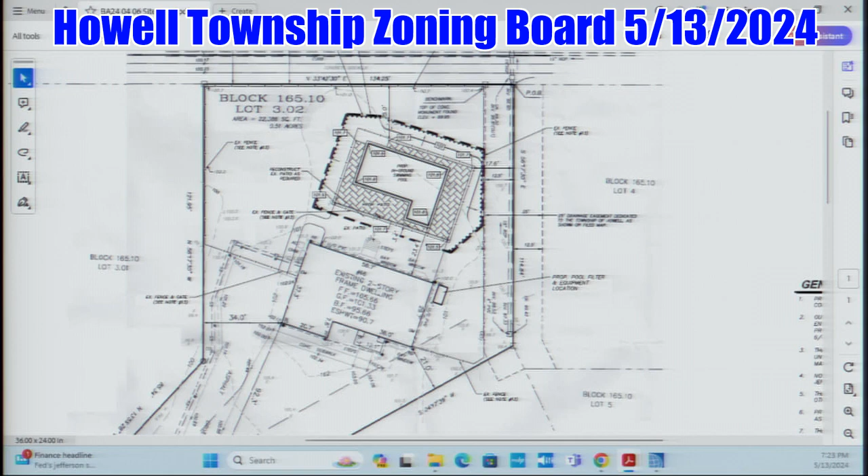Eileen, roll call. Mr. Barillo? Yes. Mr. Cantor? Yes, good luck, it looks beautiful. Thank you. Mr. Hughes? Yes. Mr. Mertens? Yes, and this is probably the quickest application approval since I've been on the zoning board. Appreciate it. Ms. Scottson? Yes.

And Mr. Say, before you put your vote on the record, I just want a couple comments. Just make sure there's part of the approval that they're going to have to get any building permit approvals, as far as like fence around the pool, make sure it's compliant with the swimming pool code. The shade canopy has to be part of it as well, just get any permits as may be required. Any backwash, it be either a cartridge system or directed towards the public right-of-way, not onto neighboring properties. Drainage pattern, same thing, to the right-of-way, not onto neighboring properties.

And then I just had one more. Construction access, I'd recommend that it be from Pemberton Place and not from Howell Road, just because Howell Road's pretty heavily trafficked, and that any curb and sidewalk that may become damaged just be replaced. And then obviously the construction access be revegetated. Those just be conditions of the approval.

Sir, can you comply with that? Yes. Okay, great. So in that case, all of that will be on the record in the resolution, and I vote yes, and have a good time. Thank you, appreciate it. Have a good night. Good luck. All right, thank you, take care.

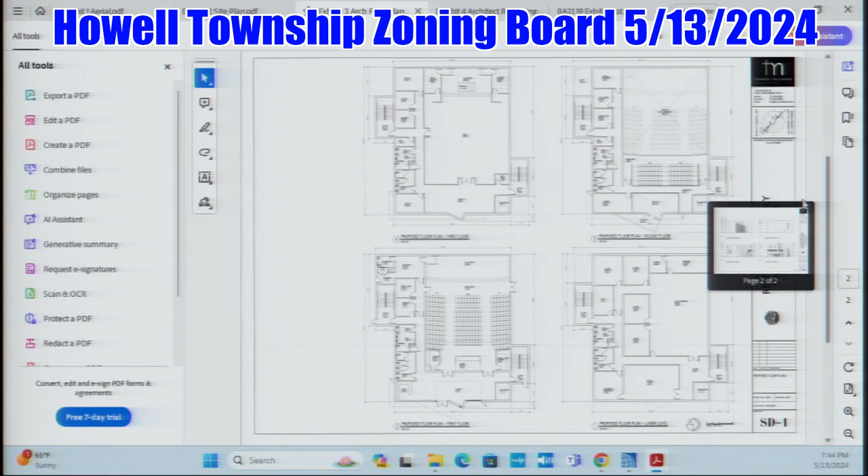There we go. Can we go back to the parking? Did you talk about the parking? The traffic engineer's going to talk about the parking, the number of spaces and how they're designed. I can talk about that, sure. So you want to talk about the 5 tandem spaces? Or 6 tandem spaces? Sure, I'll get to the parking and the access and everything else.

Okay, I just wanted to go through the floor plan on each floor and the hours of operation, exactly what we're doing here.

So the first floor is composed— wait, has that been marked? If not, we need to mark it. Yes, that was A20. Okay, go ahead, I'm sorry. So we're looking at A20, architectural floor plans and elevations. Yeah, that's A20. The architect's going to talk about the architecture of the building, but I just wanted to go over what we're doing on each floor, and then the hours of operation, just so it's on the record and everyone knows exactly what's going to be happening within the building and on the site.

So the first floor is the main sanctuary, that's the lower left, and the pastor's office, then some restrooms as well. The second floor, which is to the right, much of this is open down to the main sanctuary area, and then there's a mezzanine for the choir and additional seating. But there's also the Sunday school office, the youth office, and the sound engineer's office, and the video tech and sound studio as well. The third floor, which is... there we go.

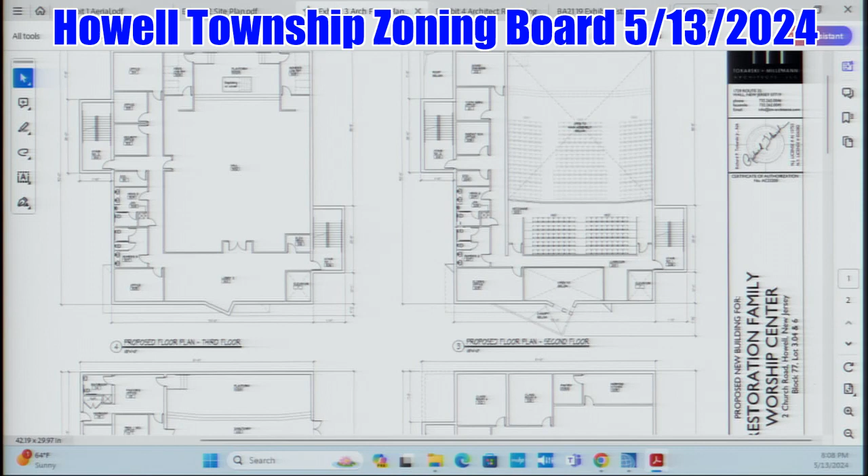The other question we had was the baptistry, how do you say it? Baptistry, which is on the 3rd floor. In my religion, we're used to babies being baptized on a Sunday with a bunch of people coming to church. That's not what you're doing there. No, we don't dunk infants. What we do is we baptize children, mainly when they become teenagers. That's when we baptize them, and our baptisms should be quarterly, but lately we've been having them maybe once a year.

And when is that done as it relates to the other activities? That would usually be done on a Saturday afternoon. So not during the peak Sunday? No, baptism is usually done on Saturday afternoon.

And then Brian described the outdoor activity, that tailgate party. Can you just explain what happens there? So every first Sunday of football, and lately it's been very sad, because all the teams that get together, they're all a bunch of losers. So our church is very heavy on football.

So we use the tailgate party as a means to reach out to our community. We invite our friends, they all come in, and basically each booth prepares a different kind of food, and we go around and share our food one with the other. That's basically what the tailgate party is. And that's one time a year? One time a year. And no other outdoor activity? No, we have no other outdoor activity.

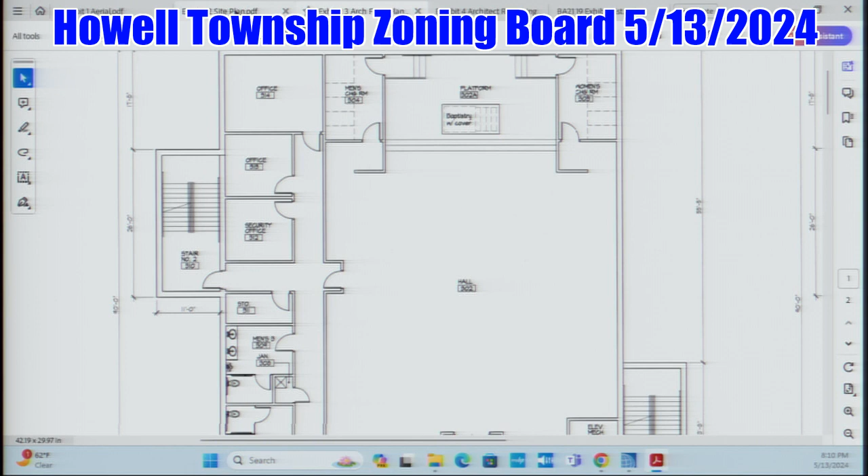And then, did you have any input on how that tandem—and you may not know the answer to this, so don't guess—but the tandem parking that was being discussed, were you familiar with that?

No, I don't have a clue what that is. Okay, yeah. And then the existing church, or the building that's all the way, the older building all the way on Church Road.

We talked about you not making any improvements to that, except that you did have intentions to replace the windows. Yeah, those windows came with the building and they're pretty bad. So we want to improve the aesthetics of the building to somewhat match the new building. So the windows are a must.

Okay, but other than that, you're not making any changes? We want to preserve that building. I have a lot of families from Howell that grew up in that church, and they very often come to me asking if I have a registry for the graves, which I don't. But they walk into the building and they sort of reminisce because they grew up in that particular building. So we want to preserve it for the generations of these families.

Now if this were approved and a new church is built, what would the old church be used for? I'm going to give that to our youth ministry. We have a very vibrant youth ministry, so I'm going to turn that over to them so that they can do what they do.

And what day of the week or frequency of that activity? Currently our youth meets once a month on Fridays. My youth pastors are here, so once I turn over the building to them, they should be able to meet once a week, every Friday.

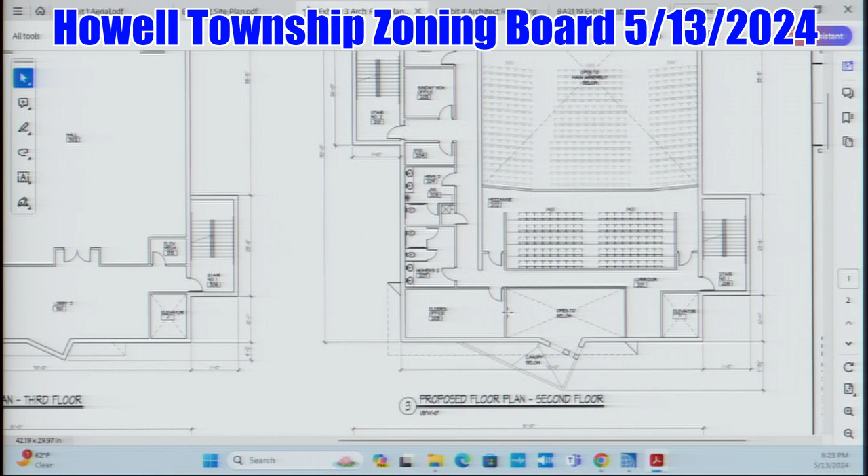A20 is the architectural plans that you prepared and submitted. There's a colored rendering before that, right? Yep. You could describe that generally, but before you do, there are technical comments raised within the planner's report, primarily from Jennifer, who wants some additional revisions. You've reviewed that and you're okay with complying as a condition of approval? Yes, I do. I know she's talking specifically about the rear elevation, which was left rather blank. Yes, we may have misinterpreted the ordinance in terms of visible facades. Because it was facing the cemetery and a tree line, and buried, we figured it wasn't too visible, so we didn't spend too much money back there, but we can definitely address it.

I don't mean to cut you off or hamper your testimony, but thank you for coming, because your plans are far and away a welcome relief from what we had seen with this application prior. We do require treatment around all four facades. I'm not looking to break the bank, I understand this is a church, so if you would just agree to work with my office on those blank sections, we can come up with something that would meet the intent of what we're trying to accomplish, without being crazy in terms of expense. You'd still require the waiver, because technically you'd need bump-outs and fenestrations, which I am not intending to require, but just something along those blank facades that may help break up the massing. Yeah, I'd be happy to work with your office and the town to come up with something acceptable.

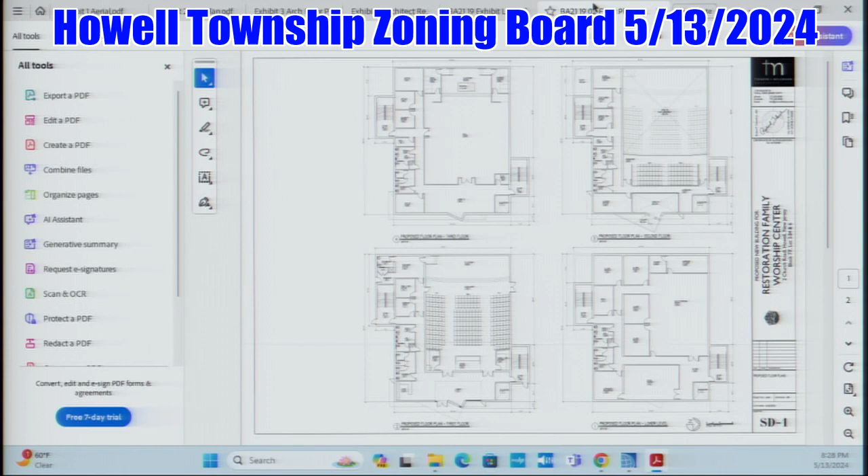The other thing I wanted to address is this piece in the middle, which is more of a modern architecture — a modern interpretation of what a steeple is. This is basically a double height space letting light into the interior. The upper area does not have any working floor space; it's really an architectural element, like a steeple, that draws your focus to the entry and the front of the building. The peak of the steeple is at 50 feet, and we'll defer to the board on whether you want that lower to match.

What's the steeple on the Coptic church? We're trying to figure that out. It's definitely higher than 40 feet, because the parapet's at 40 feet, plus or minus — this isn't engineering documents I'm looking at, it's a Nearmap third-party aerial program that gives oblique views and can approximate. They've got these arched parapet walls and stuff, anywhere from 38 to 40 feet, not including the domed steeple, which is even higher.

Those type of amenities, if you remember even from Christ Church on Oakland Road, are exempt from the height requirement. So I would suggest that, even though the top of the parapet is not the ceiling height, it does count towards the mass height. I know Justin is here and is going to give testimony, because the height is in excess of what's permitted and would require a D variance for the height. He's here to discuss the conditions as well as the conditional use criteria and the height variance.

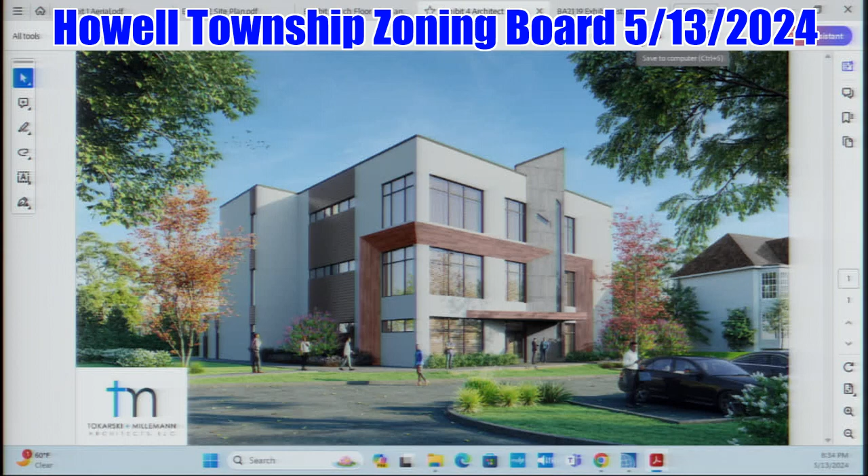We're seeking to have you qualified as a traffic expert. Please briefly place your credentials on the record. I'm a licensed professional engineer, my specialty is traffic engineering. I've been in the traffic engineering field for 50 years - January '74 was when I first started. I have an undergraduate degree in civil engineering from NJIT. We'll accept your credentials, Mr. Rea.

Thank you, John. And I counted cars for a living.

So John, you did a traffic report study some time ago that was submitted in support of the application, and I know you've since updated your counts. Can you describe for the board what you did previously, what you've done since, and give the board your conclusions? We're talking about just traffic and site circulation for now, and then we can talk about parking.

Sure. I have been involved with the project since 2020, and as the board knows, the project has evolved into what's being presented tonight. Originally, I was looking at a plan with a smaller main sanctuary of about 175 seats. I have simply updated my traffic study to include the new sanctuary area of 318 seats, and I updated the traffic counts.

We actually just did updated Sunday morning traffic counts, Sunday May 5th, just last week. I updated the analysis, and basically what I assumed was that the church would grow, as Pastor Glenn has indicated. Right now, they typically get between 100 to 150 people at a typical Sunday service, generating between 40 and 50 cars under the current situation. Of course, the new plan is going to provide for some growth, which hopefully will happen.

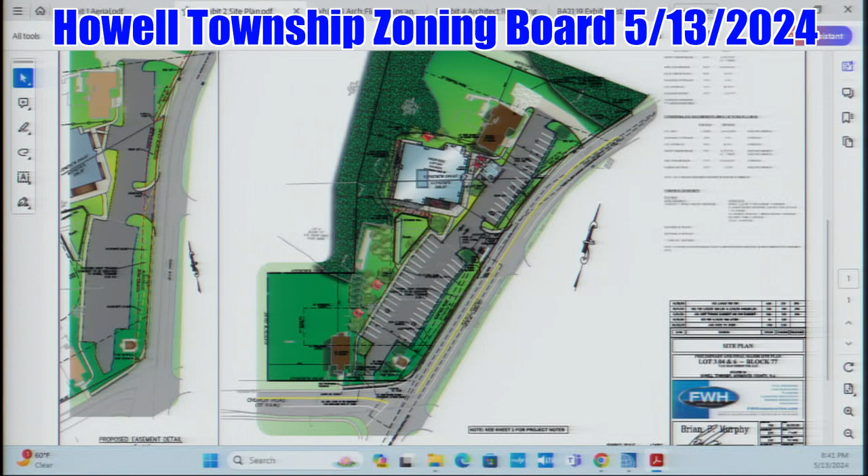That's existing, yeah. So it's like people flying down Kent Road and then making the right turn onto Church. If someone's coming out of the driveway there now, if they're going really fast, they might not see that person. So that access on Church Road is being completely eliminated, it's only for emergency purposes for fire trucks. They're moving the entrance on Kent Road even further away from the intersection, so you've got a little bit more separation, which I think improves it.

My concern is still that residential driveway. I think with signage... what I'm most concerned about, I don't know John if you have the site rendering. Between the residential and the rectory driveway and then the two full-movement driveway, you've got the bay of parking spaces. If there's a backup at the site driveway letting out of services, does someone try to go the opposite way and then come out of the residential driveway?

And so, do not enter signage there? We can post do not enter signs, and one-way arrows on the pavement indicating that it's entrance only, along with the do not enter. Correct. This came up on another house of worship application we had recently, which had pedestrian access from the neighborhood across the street. This one is a little bit different because they're relying on the commercial property across the street to help with their parking deficit.

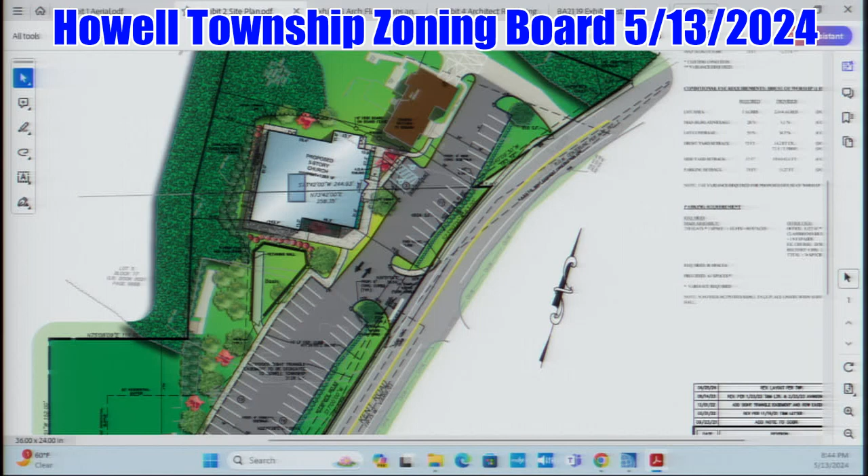They do not allow left turns out of that Church Road exit. But that's going to be closed off. I think the concern is, in the event you have a higher volume day at your service than your parking lot can accommodate, and individuals have to park across Kent Road in the daycare parking lot - which I agree, in the evenings and on Sunday the daycare center is not operating - but I will say I have witnessed from my car people flying down Kent Road. I would just be concerned that if you have a family with young children trying to cross from the east side of Kent to the west side of Kent, that's what I think...

Rea had indicated the crosswalk and advance warning sign, so if you press the button, the sign in advance of the crosswalk will flash. I just didn't understand if the security was designed to deal not only with car traffic, but pedestrian traffic coming to the facility from the other side of Kent Road. It's for both, pedestrian included.

We would agree that if the board grants approval, we'll contact the police department, coordinate with them and our private security, and if they want to supplement it in any way, we have no problem with it. And just foot traffic safety as well, correct, that's what we're talking about.

We've heard similar testimony from the other house of worship, about Easter, Christmas Eve, that kind of higher frequency attendance, so maybe PD involvement is warranted on those occasions. Pastor Glenn indicated they currently have permission from the police department to stop traffic for pedestrians, but that's an informal agreement. We'll formalize whatever we do with the police, and with the crosswalk advance warning, I think that's a great solution.